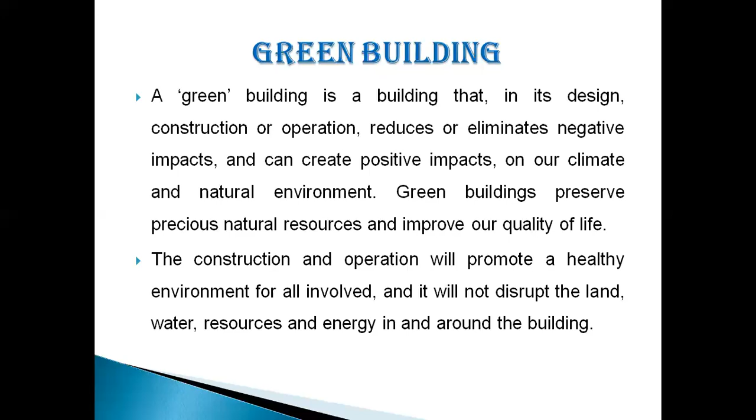The idea of a green building would be a building project that would allow you to preserve most of the natural elements around the project site while still being able to produce a building that is going to serve a purpose. The construction and operation will promote a healthy environment for all involved and it will not disrupt the land, water, resources and energy in or around the building. This is the actual definition of the green building.

Now, why is the green building important? The growth and development of our community has a large impact on our natural environment, like the effect on pollution. It may be land, air, or environmental pollution. The manufacturing, design, construction, and operation of the buildings in which we live and work are responsible for the consumption of many of our natural resources.

So there are a number of features of green buildings. First is the efficient use of energy, water and other resources, then use of renewable and non-renewable resources such as solar energy. But out of these, for the green building, we have to use only renewable resources. Next, pollution and waste reduction measures and the enabling of reuse and recycling. So basically, for the green building, we have to use the concept of 3R, that is reduction, recycling, and reusing.

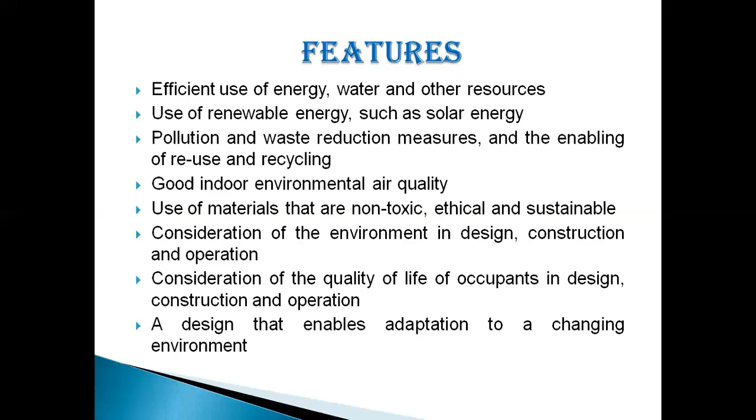Next is good indoor environmental air quality. Also, use of materials that are non-toxic, ethical, and sustainable, and consideration of the environment in design, construction, and operation. Then, consideration of the quality of life of occupants in design, construction, and operation. The last one is design that enables adaptation to a changing environment.

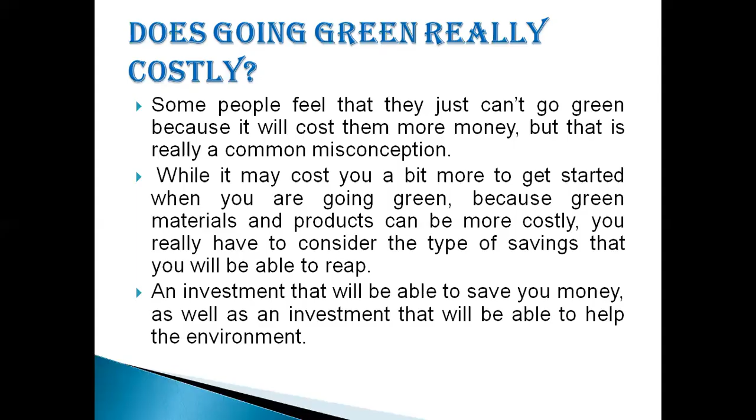Now, is going green really costly? Many people think that when we construct a green building, it is very costly. While it may cost you a bit more to get started when going green, because green materials and products can be more costly, you really have to consider the type of savings. You will be able to save on energy cost, because going green also means conserving energy. You should really look at the green building as more of an investment than anything else. An investment that will save your money, as well as help the environment.

Now, what are the benefits of the green building? Basically, we divide these benefits into three parts: environmental benefits, economic benefits, and social benefits. In the environmental benefits, reduced wastage of water, because we reuse that water. Then conserve natural resources, that is, we use solar energy. Then improve air and water quality, we reuse the rainwater, and protect biodiversity and ecosystems.

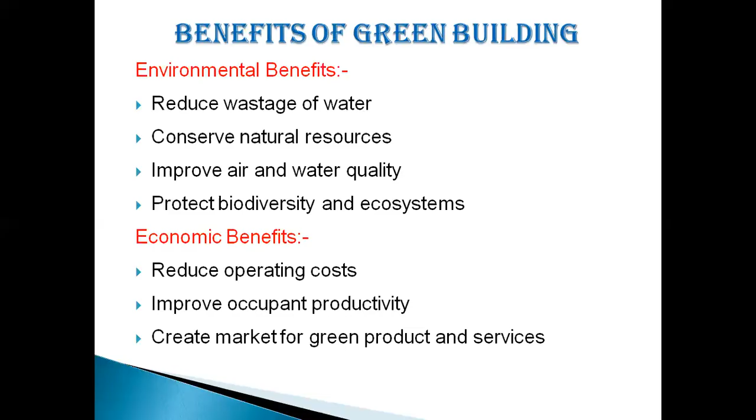Now, the economic benefits are reduced operating cost, because this is a one-time investment, and after that we require the maintenance cost only. Then improve occupant productivity and create a market for green products and services.

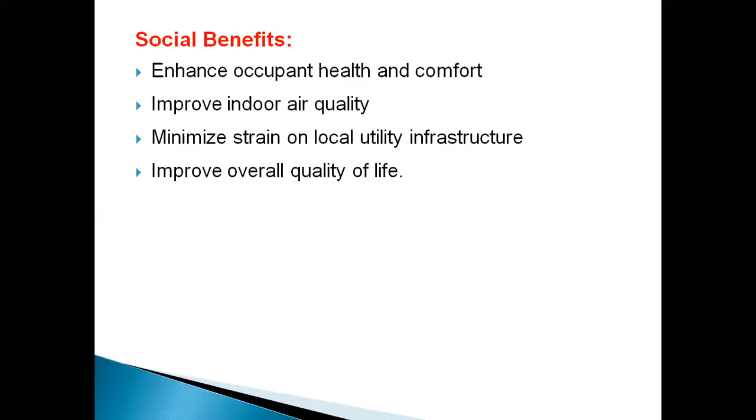And the last one is the social benefits. It enhances occupant health and comfort. Then it improves indoor air quality, because of the indoor ventilation, minimizes strain on local utility infrastructure, and improves the overall quality of life. Now there are some principles of green building design.

The green building design process begins with an intimate understanding of the site in all its beauties and complexities. An ecological approach to design aims to integrate the system being introduced with the existing on-site ecological functions performed by Mother Nature.

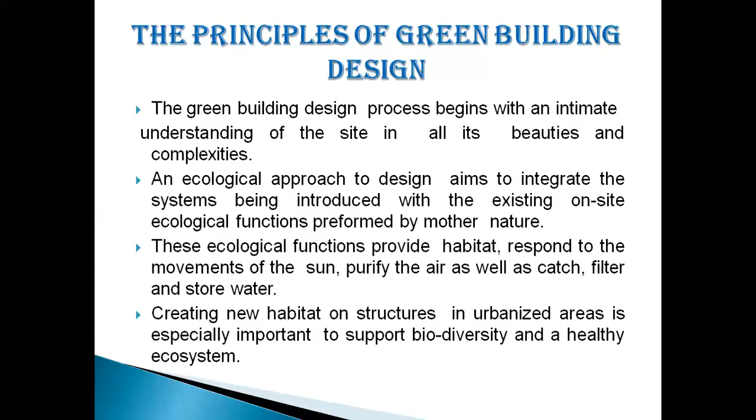These ecological functions provide habitat, respond to the movement of the sun, purify the air as well as catch, filter and store water. Designers can create features in their building that mimic the functions of a particular ecosystem. Species that thrive in natural ecosystems may also utilize habitat created in man-made structures. Now, creating new habitats on structures in urbanized areas is especially important to support biodiversity and healthy ecosystems.

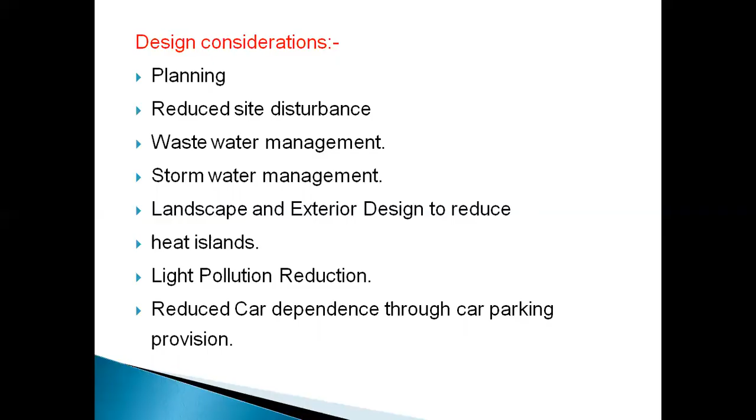So there are some design considerations that we have to study. The first one is planning, then reduce site disturbance, wastewater management, stormwater management, then landscape and exterior design to reduce heat islands, then light pollution reduction, and reduced car dependence through car parking provisions. So out of this, we have to study the water system for the green building.

Now, when we study the water system, water, often called the source of life, can be captured, stored, filtered, and reused. It provides a valuable resource to be celebrated in the process of green building design. According to Art Ludwig, it creates an oasis out of grey water. Only 6% of the water we use is for drinking. So there is no need to use potable water for irrigation or sewage. The green building design course introduced methods of rainwater harvesting, grey water systems, and living pools.

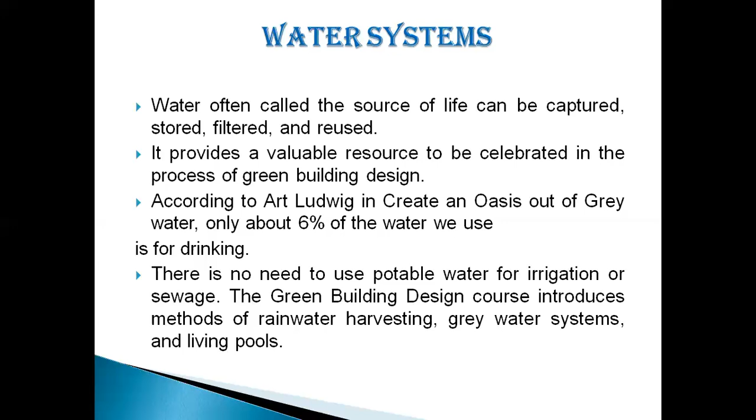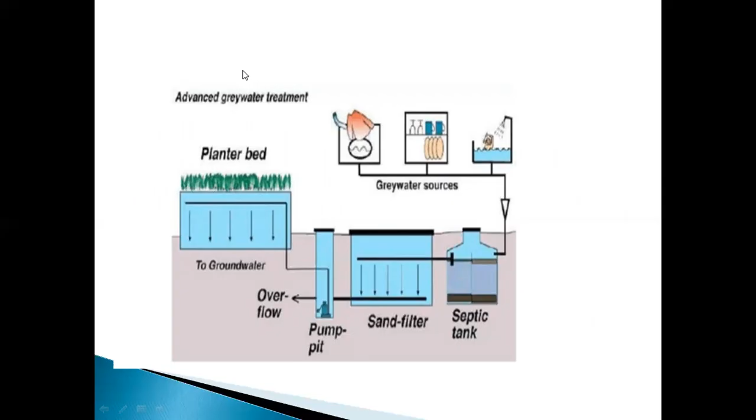Now this is basically the water system. So here we can observe that this is the planter bed. Then this water after percolation is collected through overflow, then the sand filter from the septic tank, and this is the treatment of grey water sources.

Now next is passive solar design. In passive solar design, the sun's energy is used for the heating and cooling of living spaces. The building itself or some elements of it take advantage of natural energy characteristics in its materials to absorb and radiate the heat created by exposure to the sun. Passive systems are simple, have few moving parts and no mechanical system, require minimal maintenance and can decrease or even eliminate heating and cooling costs.

Now, solar passive features: first of all, the shape and form of the building, then orientation of the facades, design of the building plan and section, and last one is the thermal insulation and thermal storage of the roof.

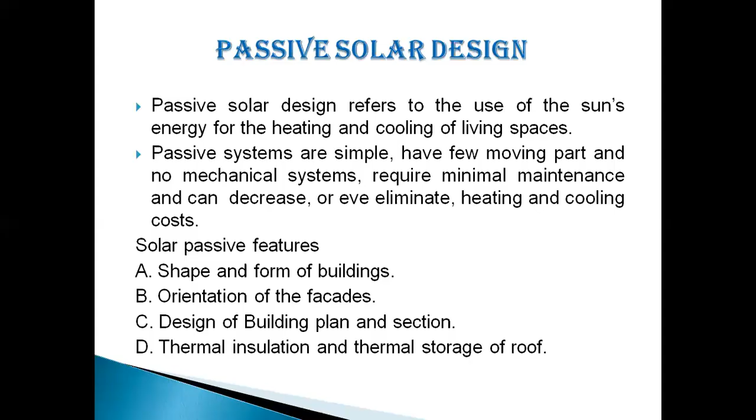Now next is green building materials. Before choosing materials, we can find out where the material comes from, how it has been harvested, what the ingredients are, and whether they are salvaged, reused or reusable. We can research how they will perform over the lifetime of the building.

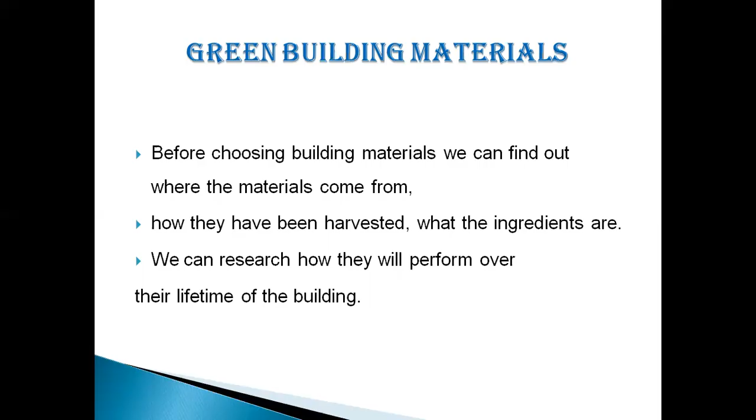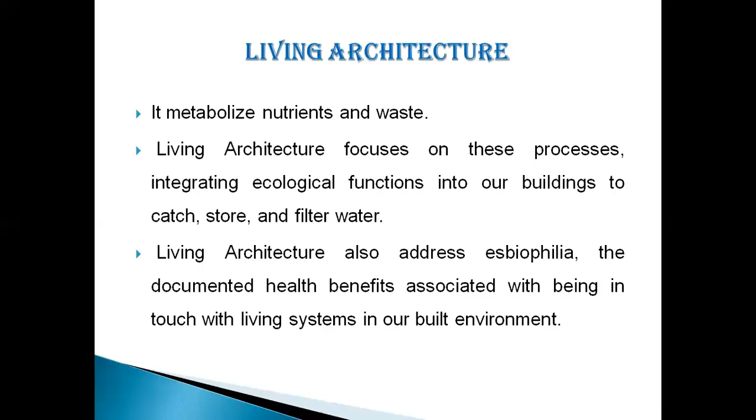Now next is living architecture. In living architecture, we take for granted that our environment, like our bodies, can metabolize nutrients and waste. Living architecture focuses on these processes, integrating ecological functions into our buildings to catch, store and filter water, purify air, and process other nutrients. Living architecture also addresses biophilia, the documented health benefit associated with being in touch with living systems in our built environment.

Now the advantages of green building. These advantages are divided into parts. The first one is environmental advantages. It reduces operational energy, it reduces the water requirement, and there is a lesser volume of wastewater generation because we reuse this water on the same site, resulting in less water pollution, less material use, longer building life, and also low maintenance cost.

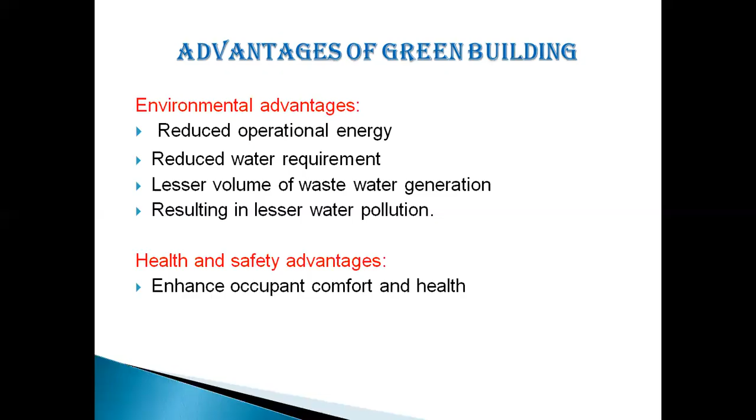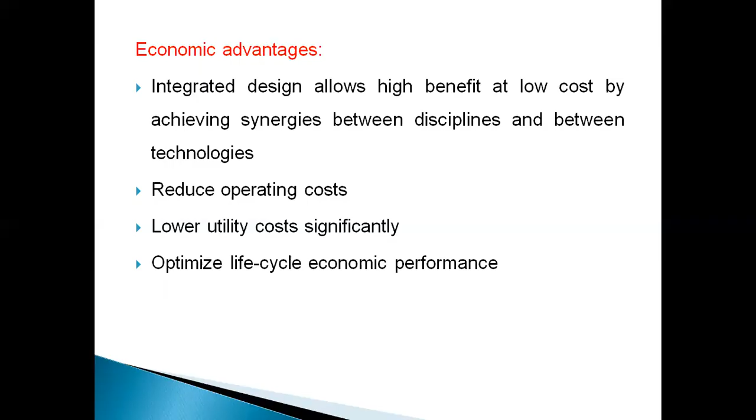Next are health and safety advantages. It enhances occupant comfort and health. There are also community advantages: it minimizes the strain on local infrastructure and improves quality of life. And the last one is economic advantages. Integrated design allows high benefit at low cost by achieving synergies between disciplines and between technologies. It also reduces operating costs, significantly lowers utility costs, and optimizes life cycle economic performance.